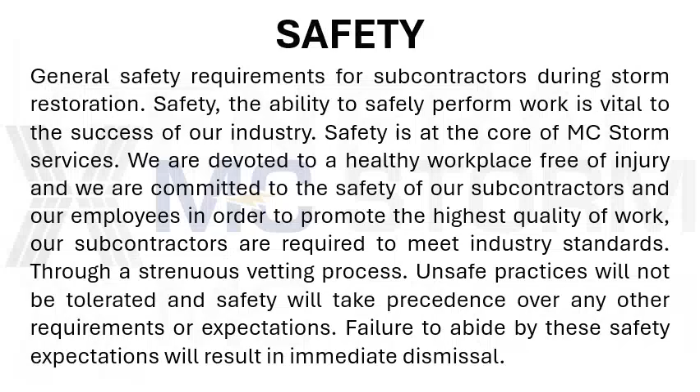General: the expectations outlined below are set forth, without question, by MG Storm Services. In addition to these guidelines, rules, and expectations, all subcontractors are also required to follow guidelines set forth by OSHA 1910.269. If either of the rules cause confusion or contradiction, crew and team leaders should choose the more stringent expectations between OSHA and MG Storm Services.

Personnel: subcontractors are trusted and expected to hire and vet competent and qualified employees to perform quality work safely and efficiently. In addition, subcontractor will always provide competent and qualified supervision on the work site. At least 2 employees at each work site should be trained in first aid and CPR.

Driving safety: seatbelts are always mandatory while in a moving vehicle, regardless of the travel distance. This includes, but is not limited to, mobilization, demobilization, moving around staging location, on customer property, between poles, etc. Cellular devices are not permitted while driving a moving vehicle. Personnel should not be texting while operating a moving vehicle. Subcontractors will check for proper licensing and training for personnel according to the class of vehicle being operated.

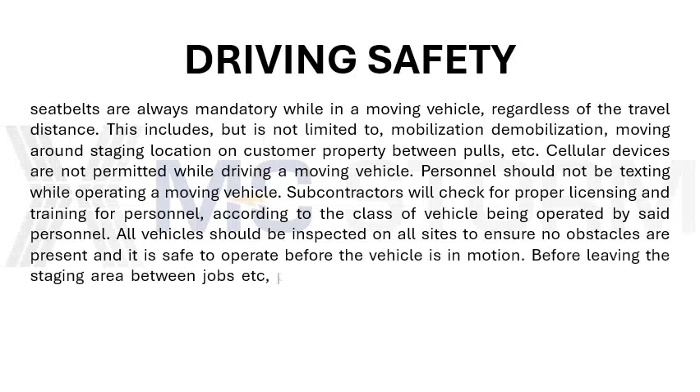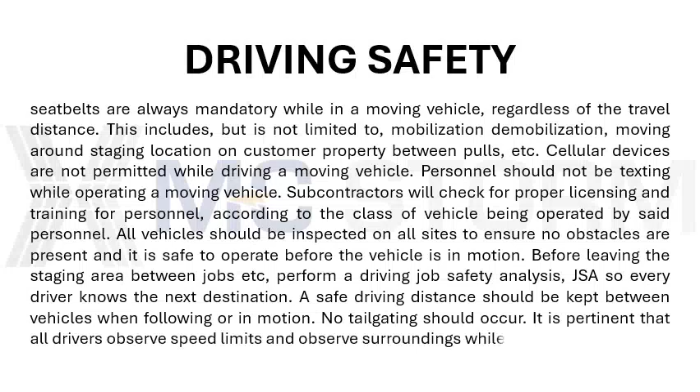All vehicles should be inspected on all sides to ensure no obstacles are present and it is safe to operate before the vehicle is in motion. Before leaving the staging area, between jobs, etc., perform a driving job safety analysis, JSA, so every driver knows the next destination. A safe driving distance should be kept between vehicles when following or in motion. No tailgating should occur. It is pertinent that all drivers observe speed limits and observe surroundings while operating a vehicle.

Vehicle safety checklist: be sure all materials and equipment are properly secured. Conduct a 360-degree walk-around inspection before operating vehicle. Fasten seatbelt and check mirrors, adjust as needed. Avoid backing up, use a spotter if possible. Use road cones around vehicle while parked.

Traveling to work locations: conduct a driving JSA or tailboard meeting before driving to the next destination. Follow at a safe distance and observe speed limits. Pay close attention to changing road and weather conditions. Nothing is normal during a storm, so expect the unexpected.

Professionalism and fitness for duty: any person working under or representing MG Storm Services is always expected to act in a professional manner worthy of respect. MG Storm Services will not tolerate any unprofessional behavior. Any person working under or representing MG Storm Services will be drug and alcohol free. Alcohol, firearms, and illegal drugs not medically prescribed are prohibited in or around all MG Storm Services work sites, including staging areas and in transit from job to job.

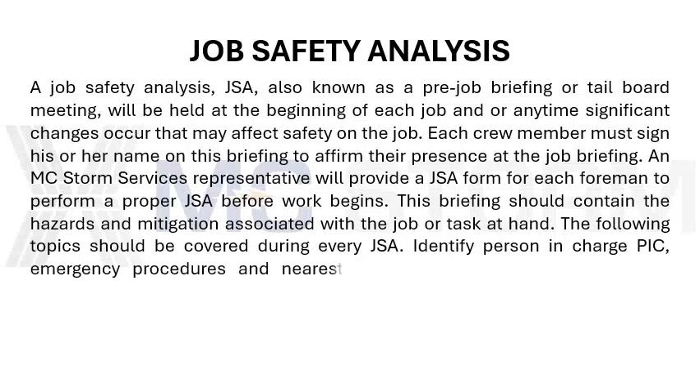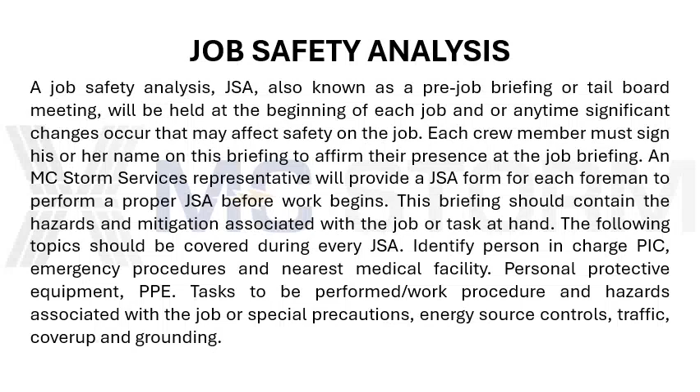This briefing should contain the hazards and mitigation associated with the job or task at hand. The following topics should be covered during every JSA: identify person in charge (PIC); emergency procedures and nearest medical facility; personal protective equipment (PPE); tasks to be performed, work procedure, and hazards associated with the job or special precautions; energy source controls; traffic, cover-up, and grounding.

Incident reporting: all events, injuries, electrical flashes, vehicle accidents, incidents involving the public and customer outages, regardless of severity, shall be reported immediately to your MG Storm Services representative. See the attached incident report form.

The following should be reported: type of accident, number of persons involved, location of accident — GPS coordinates are ideal. Inform your MG Storm Services representative if rescue, ambulance, wrecker, etc. was needed or called.

Required personal protective equipment, PPE. Employees shall be required to use, at a minimum, the following PPE at all times while performing storm restoration work on an MG Storm Services project: hard hat, safety glasses, work gloves, reinforced toe boots, reflective vest.

Employees will be required to use, at a minimum, the PPE listed above and the following PPE at all times while performing work on a pole, structure, cabinet, or vault that has a conductor attached that has been tested, de-energized, and grounded. This includes work performed from an insulated aerial device or from the pole during climbing operations: Class 3 rubber gloves, long-sleeved fire-retardant shirt, fall protection harness, aerial device or in a manhole/vault, fall protection device, buck squeeze or similar OSHA-approved device, when climbing or working from a structure.

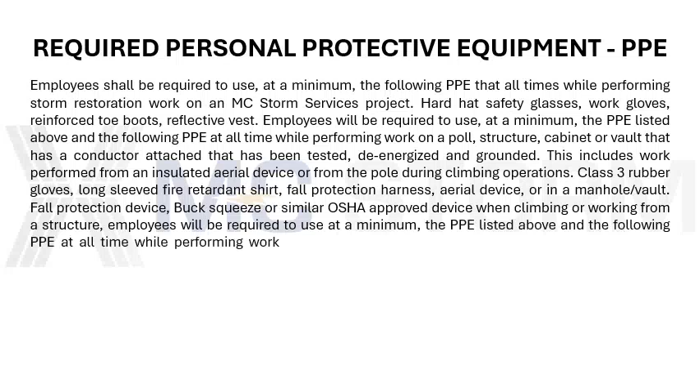Employees will be required to use, at a minimum, the PPE listed above and the following PPE at all times while performing work on a pole, structure, cabinet, or vault that has an energized conductor attached. This includes work performed from an insulated aerial device or from the pole during climbing operations: Class 3 rubber gloves, Class 3 rubber sleeves, long-sleeved fire retardant shirt, fall protection harness, aerial device or in a manhole/vault, fall protection device, buck squeeze or similar OSHA-approved device, when climbing or working from a structure.

These are basic guidelines for required PPE. Depending on the project location and special environmental conditions, there may be additional required PPE: V-watch, chaps for sawing, earplugs, face shields, etc.

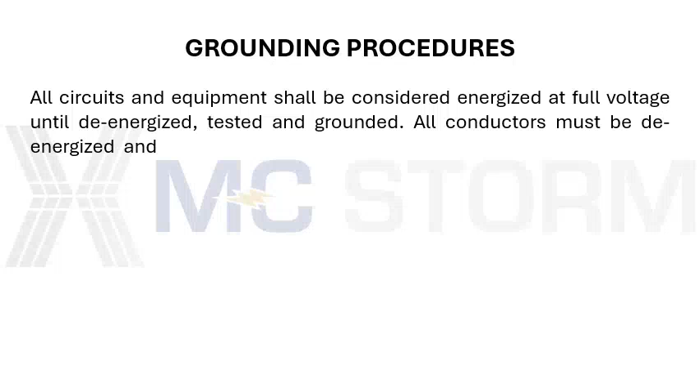Grounding procedures. All circuits and equipment shall be considered energized at full voltage until de-energized, tested, and grounded. All conductors must be de-energized and tested before installing grounds. Testing must be done with an approved voltage detector, Salisbury Model 4667 or similar device. Buzzing with a hand tool is not an acceptable method for testing a line to be de-energized.

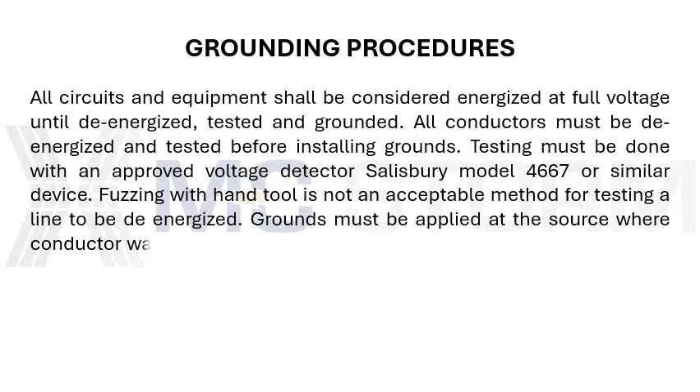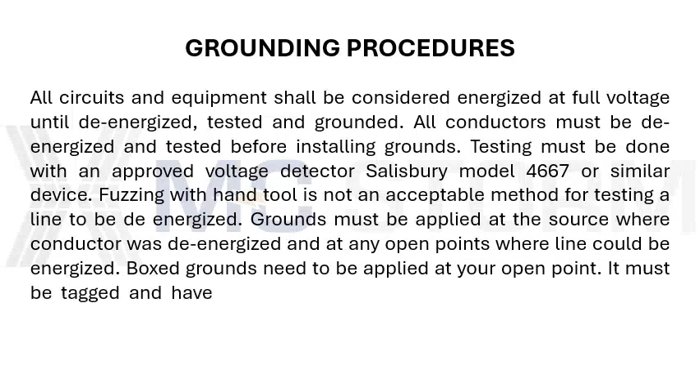Grounds must be applied at the source where conductor was de-energized and at any open points where line could be energized. Boxed grounds need to be applied at your open point, it must be tagged, and have a pole wrap applied. Tags and pole wraps will be furnished by your MG Storm Services representative.

Climbing poles and structures. Climbing of poles and structures must be performed by a trained and qualified employee. A fall protection device must always be used while climbing. Employee must always be secured to the pole or structure, 100% fall protection.

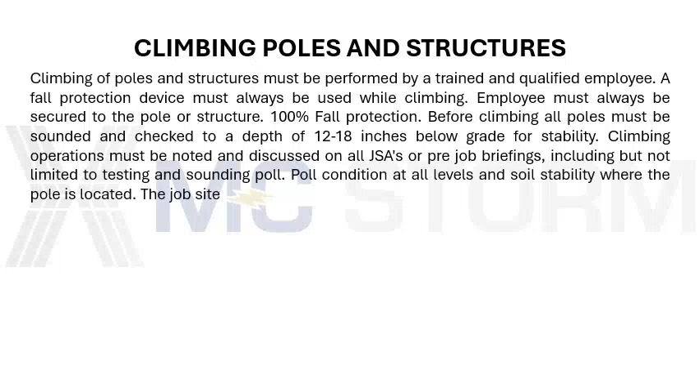Before climbing, all poles must be sounded and checked to a depth of 12 to 18 inches below grade for stability. Climbing operations must be noted and discussed on all JSAs or pre-job briefings, including but not limited to testing and sounding pole condition at all levels, and soil stability where the pole is located.

The job site address must be clearly noted on the JSA and discussed with all crew members in case of a need to call. All crews will need to refrain from climbing any pole or structure with visible cracking or breaking.

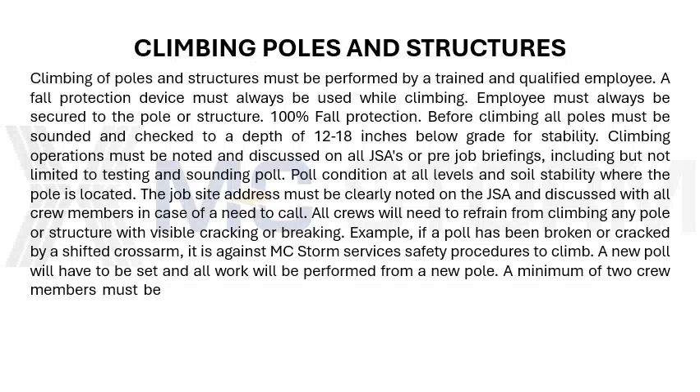Example: if a pole has been broken or cracked by a shifted crossarm, it is against MC Storm Service's safety procedures to climb. A new pole will have to be set, and all work will be performed from a new pole. A minimum of 2 crew members must be present while the pole is being climbed.

Both crew members must be trained in first aid/CPR and pole top rescue. The climbing gear for the man on the ground must be at the work site and not on the truck for rescue purposes. The climber up the pole must have a handline attached to the pole or crossarm for rescue purposes.

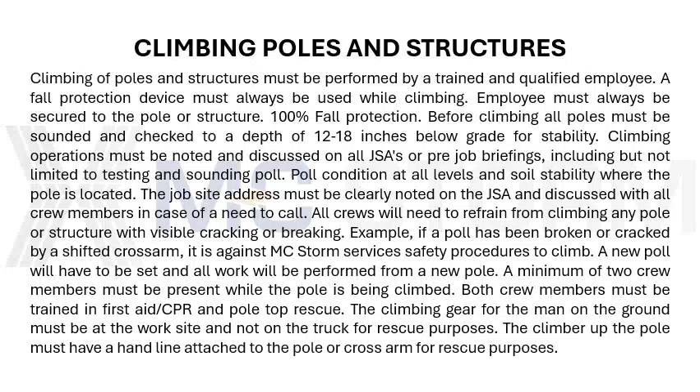Qualified observer. A qualified observer is required while crew members are performing work by utilizing rubber gloves on conductors or equipment above 600 volts. The qualified observer must be positioned on the ground where he can see the lineman's hands and must be trained and prepared to perform emergency rescue procedures.

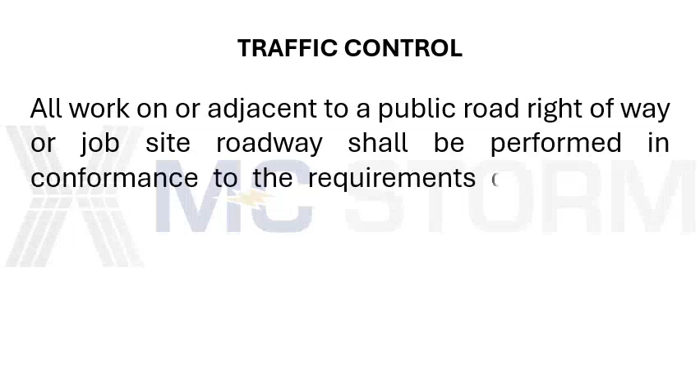Traffic control. All work on or adjacent to a public road, right-of-way, or job site roadway shall be performed in conformance to the requirements of all federal, state, and local traffic laws. Subcontractor shall furnish crews with road cones, stop/slow paddles, road signs, and other devices as required.

Loading of poles and equipment. All loading of poles, transformers, and other equipment must be performed with an approved sling or lifting device that is labeled and rated for the weight being lifted. Pole tongs are not to be used for the loading or unloading of poles. Care should be taken to avoid injury when working around pole piles. Be extra careful around temporary pole piles.

Extreme temperatures. Care should be taken when working in extreme temperatures. In extreme heat, crew members should stay hydrated and take breaks, as needed, to avoid heat exhaustion. If you feel you are getting too hot, alert your supervisor immediately.

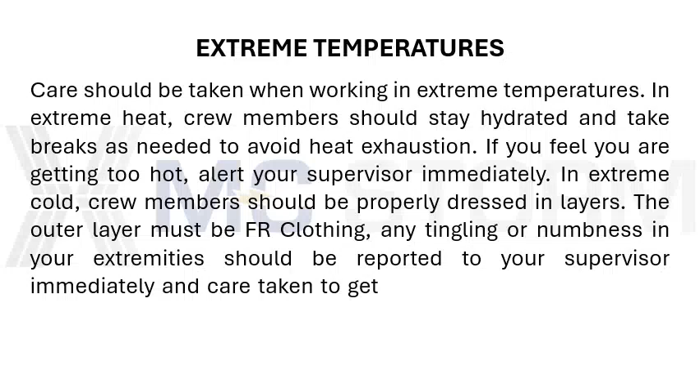In extreme cold, crew members should be properly dressed in layers. The outer layer must be FR clothing. Any tingling or numbness in your extremities should be reported to your supervisor immediately and care taken to get in a heated place and begin warming up.

Incidentals. Timesheets must be signed by your coordinator and MG Storm Services representative. Foreman/PSE must inform an MG Storm Services representative if his or her crew sits for more than 1 hour without assigned work. All motorized vehicles must have MG Storm Services displayed on the vehicle. Do not dig without an emergency locate ticket.